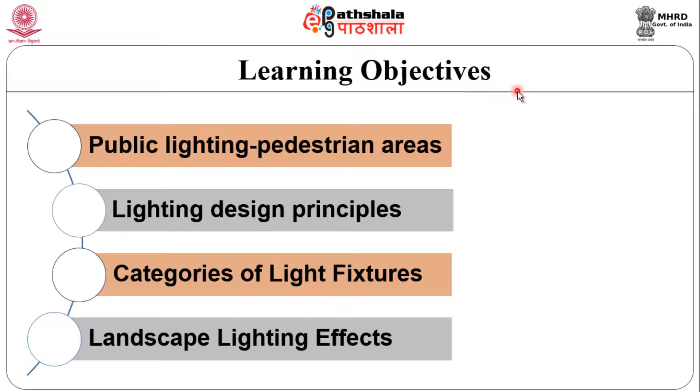Today we will be seeing lighting of public spaces under the subject urban landscape design. The objectives of today's lecture are on public lighting, mainly focusing on pedestrian areas, lighting design principles, categories of light fixtures, and landscape lighting effects.

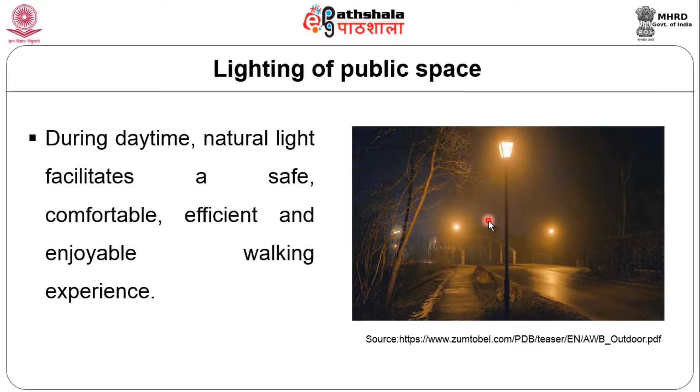Lighting of public space: we know that normally in daytime the natural light facilitates a safe, comfortable, efficient and enjoyable walking experience. The image shown here is a nighttime image. You can visualize how this place would be without artificial lighting - totally dark, a deserted area. But only with the provision of artificial lighting does it become a much better walking space.

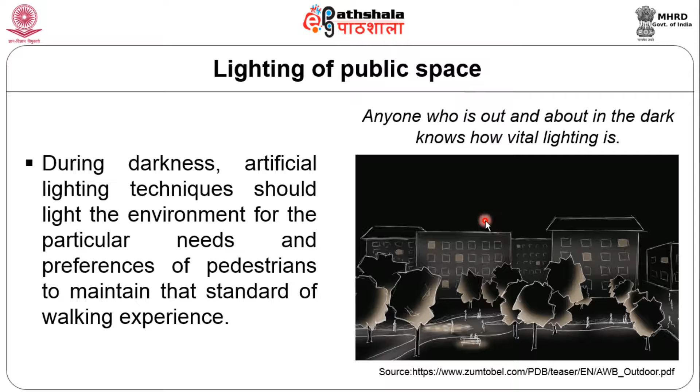So as a saying goes, anyone who is out and about in the dark knows how vital lighting is. During darkness, artificial lighting techniques should light the environment for the particular needs and preferences of pedestrians to maintain that standard of walking experience.

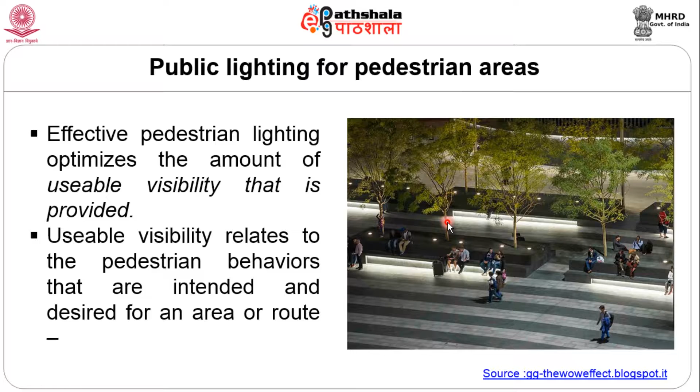Public lighting for pedestrian areas: effective public lighting optimizes the usable lighting that has to be provided. Usable lighting is nothing but the light within the range of the spectrum between ultraviolet rays and infrared rays - that visible light within the color spectrum that is visible to the human eye.

It relates to the pedestrian behavior that is intended and desired for any area or route. So it is the nature of those pedestrian activities and locations that should drive determination of the appropriate size, location and intensity of the lighting.

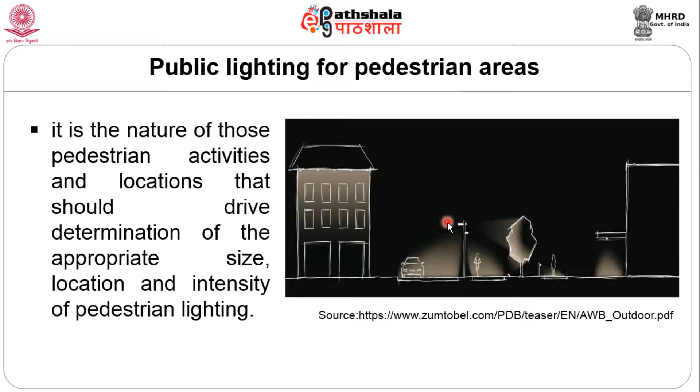So based on the specific area for which lighting has to be put on, you have to decide what kind of lighting system has to be used, what size, where it has to be located, at what distance, and what the distribution of light has to be. This has to be decided for any pedestrian area.

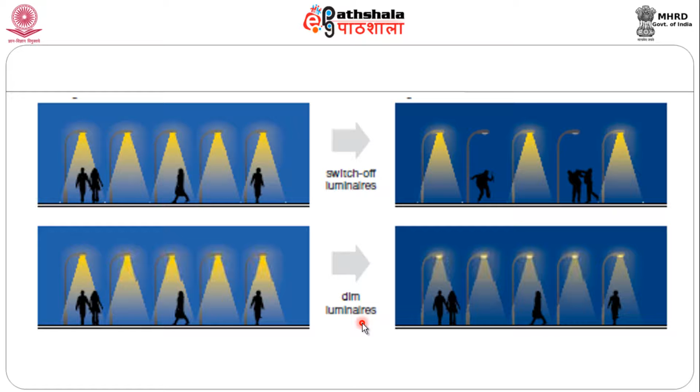Instead you can actually dim the light spots or the luminaires, so that you get a very distributed lighting system all around and avoid lots of vandalism or crime in that area. This way you can also avoid lots of energy losses.

Now we are going to see about pedestrian lighting. Pedestrian lighting is nothing but the lighting kept on open spaces or outdoor areas, where lots of user groups are mainly pedestrians. Lights which illuminate pedestrians or pedestrian facilities are called pedestrian lighting.

There are three types of lighting systems: primary, supplementary, and decorative. Primary takes care of all the lighting put on outdoor areas, mainly for wayfinding and also for safety issues, to lessen hazards. That covers all the primary lighting systems.

Second is supplementary. Supplementary is part of the larger lighting system, useful for highlighting any specific area or task. The third is decorative, which is mainly for aesthetic purposes - suppose we need to highlight a sculpture or a fountain, such decorative lighting is used.

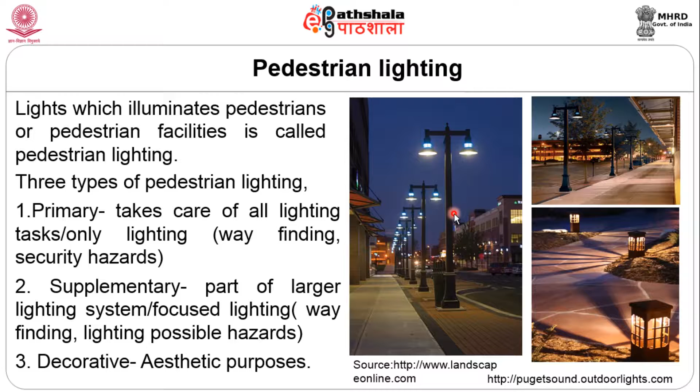Now, public lighting in pedestrian areas. There are three main factors by which public lighting in pedestrian areas can be controlled. The first is the angle, that is the angle between the object and the viewer. Second is the distance between the object and the viewer.

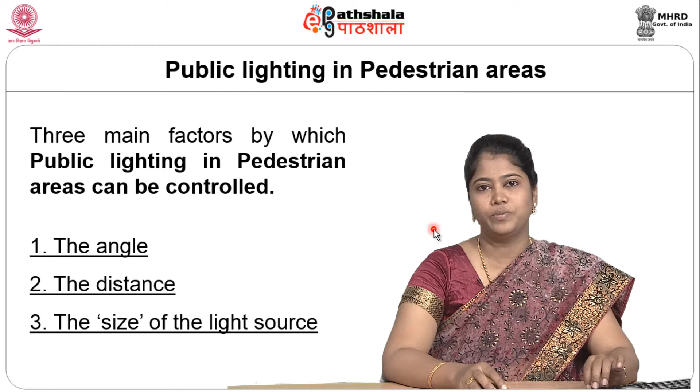Third is the size of the light source - how big the light source or the light fixture has to be. First is the angle between the light source and the viewer.

Lighting is generally off axis. This is normal even in natural light, the sun is not always on top of the head of a user, so it is normally off axis. Similarly, the artificial light that we create need not be on top of the head, meaning it need not be on axis, it is normally off axis.

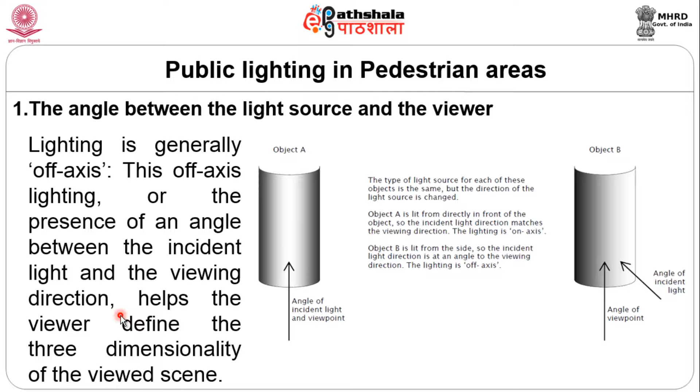This off axis lighting, or the presence of an angle between the incident light and the viewing direction, helps the viewer define the three dimensionality of the viewed scene. That is, when an angle is created between the incident light and the viewer, you see the 3D effect of the object.

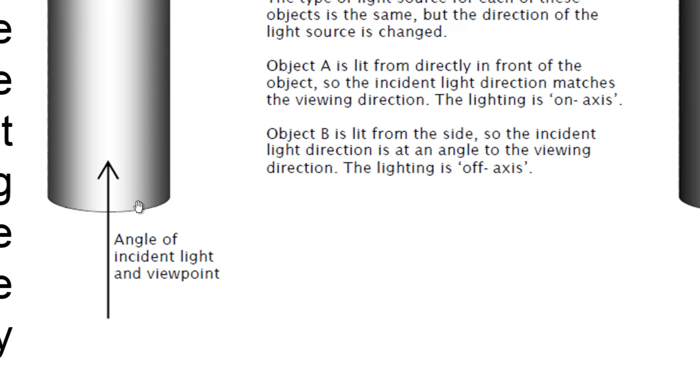For example, in this image you could see the on axis image where the angle of the incident light and the viewpoint is the same. Whereas in this image, it is the same kind of image where the angle of viewpoint is in one direction and the incident light is in another direction, where an angle has been created, then there is a light and a shadow that has been created.

So you see a very well lit object which lets you know about the form and the 3D image or the quality of the object. This is called off axis lighting.

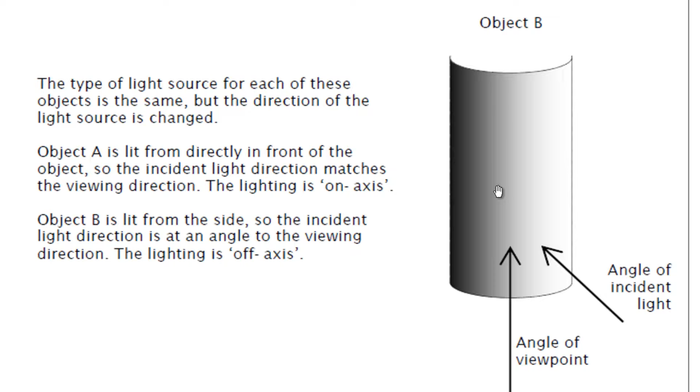The third is the size of the light source, based on how big the light source is. A subject lit by a small light source has a narrow or abrupt transition zone, so the lighting is termed a hard light source.

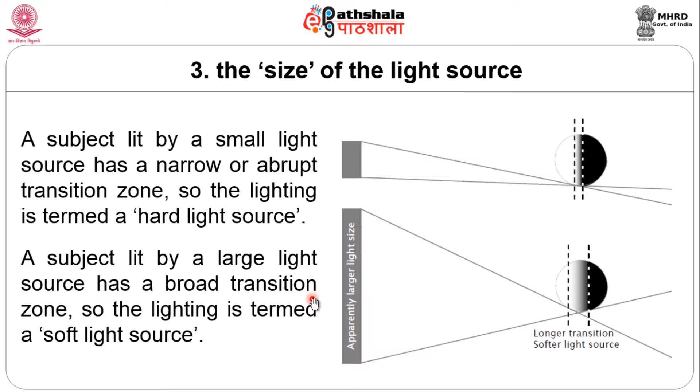The image on top shows a very small light source, where the transition between the lit surface and the shadowed area is very little - this is called a narrow transition zone. Whereas with a larger light source, the transition zone is wider, so it is called a softer light source. A subject lit by a large light source has a broad transition zone, so the lighting is termed a soft light source.

Now we are going to talk about colored lighting. Colored lighting is primarily used in areas where you want to highlight an object, where you want to lit the surface. First under colored lighting is the color appearance.

It refers to the apparent color of the emitted light, the actual color which is evident because of the light source. The color appearance of lighting can be selected to complement the scene being lit to create prestigious and attractive effects. This image shows white light which has been put on the roads, and the effect is so evident that it shows the natural color rendering of the space.

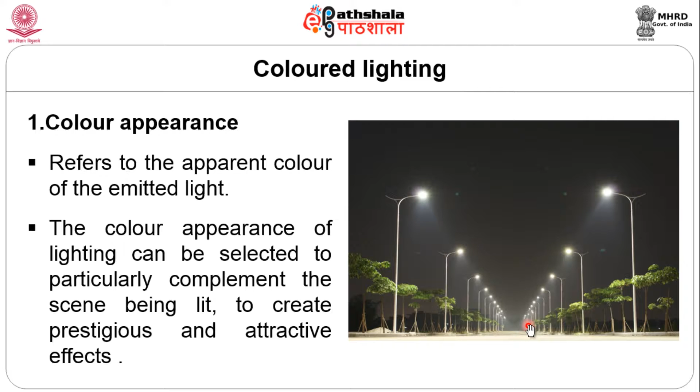The second point under color lighting is color rendering. Based on the quality of light and the color of the light, different effects can be rendered. It refers to the effect that lighting has on the colors of the object it illuminates.

This image is a contrast between the white light source and the colored light source. On the right is the orange light source, like a sodium vapor lamp used on the streets, which gives a very orangish effect on the foliage, the roads, the pavement and the objects placed on that surface. Whereas white light is more of a natural color, similar to a daylight appearance.

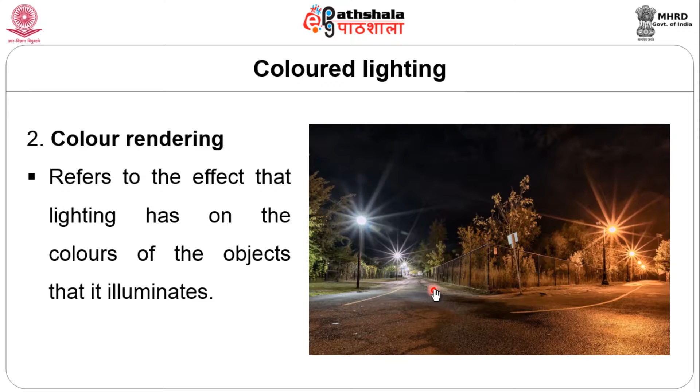The third is the nuisance of light - how we can light the surface, what quality it gives, and what we are supposed to avoid, so that there is no nuisance created because of lighting the surface.

Nuisance of light can be given through misdirection of illumination, creating glare or spill light. Glare is also called nuisance of light because it's light we cannot see in our normal vision. Similarly, spill light is when the target area is supposed to be lit, but we also cover other areas not supposed to be lit. Inappropriate lighting is also called nuisance of light because it's inappropriate in that particular place. Sometimes even over lighting or under lighting can become a nuisance.

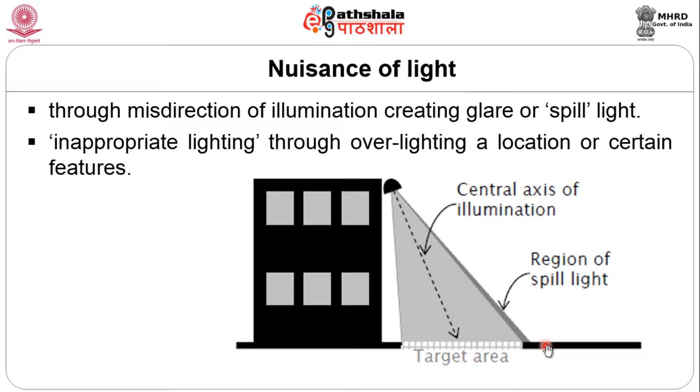This image shows the target area in which the axis is being targeted for lighting. This is the central axis of illumination. The target area is more and there is less spill light, so this is considered normal lighting. Whereas this image shows more spillover light than the target area, so this is called nuisance of light.

Glare occurs when light is seen as too bright, relative to the ambient brightness the viewer has adapted to. For example, when a pedestrian moves rapidly between an area of low luminance and high luminance. We normally see this in underground parking areas, where we step out and tend to get this nuisance of light, glare, because from darker spots when you step into very bright light, you get glare. That is also nuisance of light, so when we design lighting systems we have to take care of that.

Spill light occurs where illumination is provided outside the target area. Illumination can also spill upwards; it need not be on the ground, it can project onwards. Suppose you are illuminating a tree branch, then it's upward lighting. The spill light need not be on the feature, it can be away from the feature, so it will lit the sky. That is called sky glow, which is one of the nuisances of light.

Next are the objectives of outdoor lighting: improving the legibility of critical nodes, landmarks, circulations, and activity zones in the landscape. So wherever people move, gather, or concentrate, and also to differentiate between paths they take. If there is a junction and they want to decide which path to take, lighting at critical nodes helps, and also to highlight landmarks, since landmarks are deciding factors of locations, and mostly circulation points in pathways decide which way pedestrians go. So for all this, lighting is required.

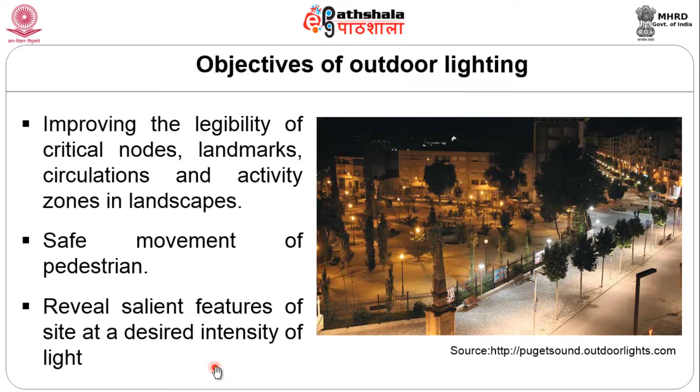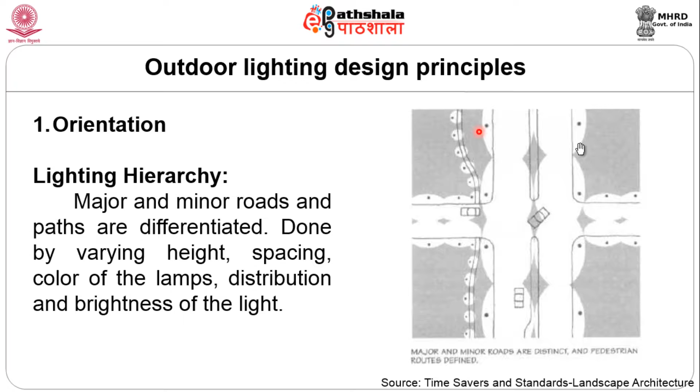Pathways need not be straight, they can be meandering, but based on light positions, distribution, and the interval where placed, patterns are created. This is called lighting hierarchy. The next is clear lighting patterns under orientation. Staggered lighting or staggered layout of roads and pathway lighting tends to obscure rather than reinforce the direction of circulation and location of intersections.

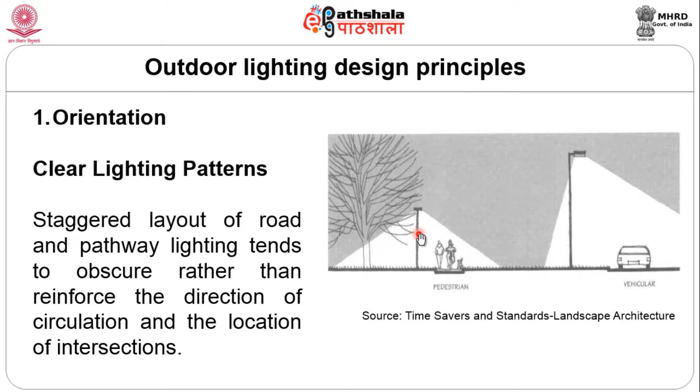The next is intersection articulation, that is how to identify route areas, arrival points, and how to differentiate between the nodal points. First is how to differentiate the decision points, crossings, and arrival points. The presence, shape and nature of lighting will help you determine the intersections.

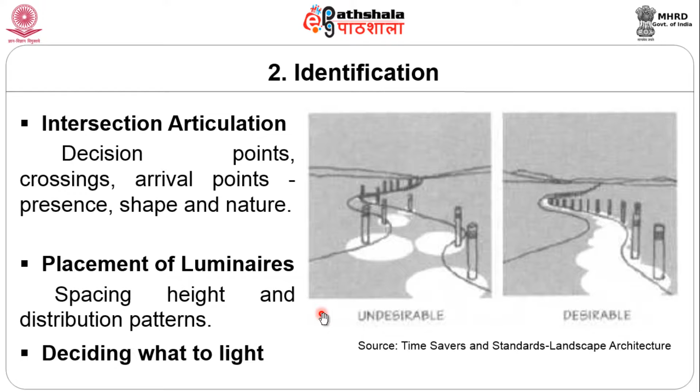That is under the placement of luminaires, based on the spacing, height and distribution pattern of how the lighting system can be kept. The third is deciding what to light. This is much more important because normally we light all areas, which is very undesirable, but we have to specify what area should be lit and which area should not be lit.

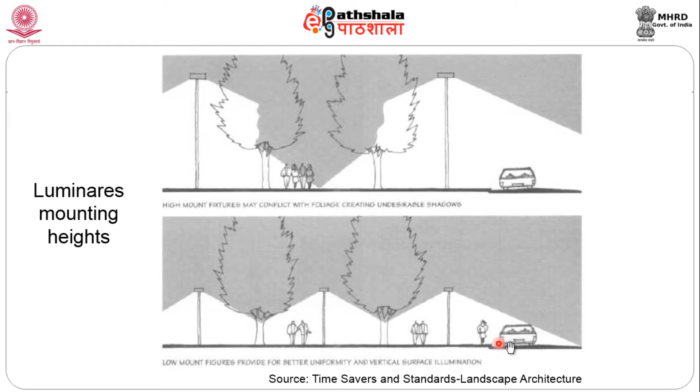So if you start decreasing the mounting heights of the lights, the image at the bottom shows a very desirable lighting system based on mounting heights, so that you get lots of lit surface, and because of the foliage of the trees it is not getting disturbed.

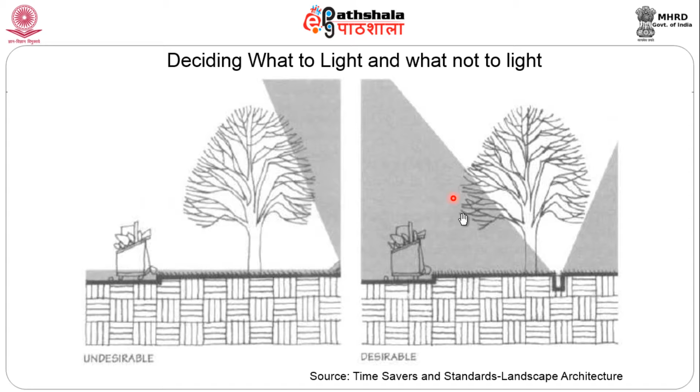There are lots of sunken lighting systems with louvers, so you can highlight only the required feature. It could be a statue, a sculpture, or even a tree that you wanted to highlight, so that you can avoid these undesirable areas. So you have to decide on what to light and what not to light.

The third is safety. Safety is the most important factor to consider in outdoor areas, mostly in pedestrian areas. For safety factors, the first and foremost thing we have to see is glare. If there is lots of glare in the outdoor area, people will get blinded at that particular point, and the safety measure goes off. Glare is nothing but the visual discomfort that we get in any outdoor area.

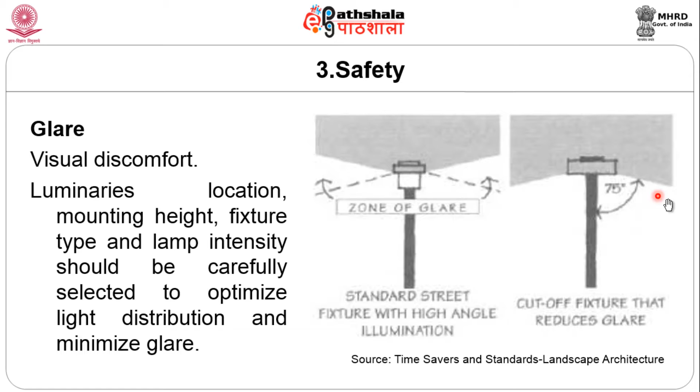The next is underlighting. Even if you have less lighting, which is inappropriate lighting, that is also a safety issue. Less lighting is hazardous to protect pedestrians and public open spaces. So these are certain images of how glare and underlighting can create lots of safety problems.

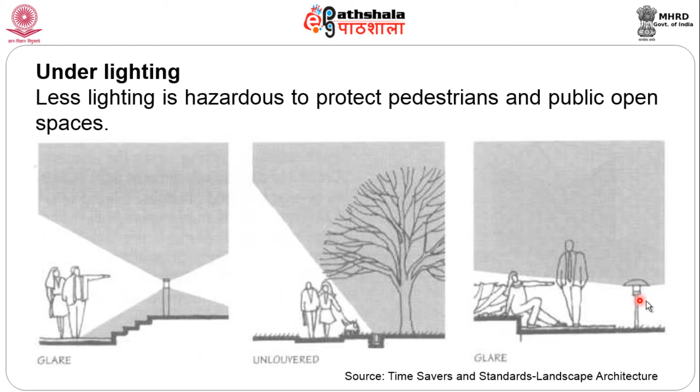The third image is again talking about glare, but here normally light fittings are oriented towards the necessity or need of the people. Suppose if they are walking on the walkways, then such bollard lightings or smaller low level lightings can work. But in case there is a seating provision, or sometimes humans tend to sit wherever there is a possible provision made, then in such cases it is like a glare for them, so that is also to be avoided.

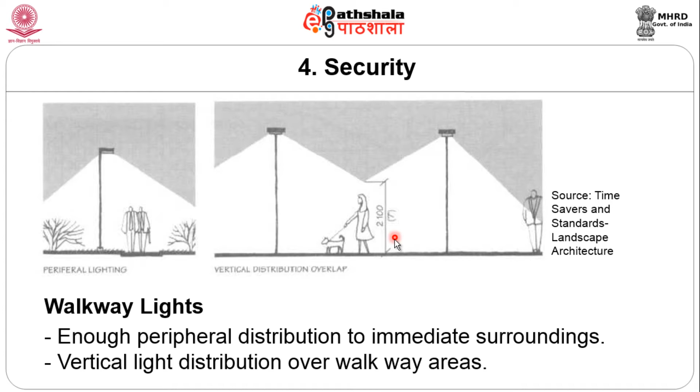The second is vertical distribution over the walkway areas. If there are two lighting poles, the light which overlaps creates a diffused light in the center. This is called vertical light distribution, and this is primarily used in most pedestrian areas, particularly for walkways.

The next is on atmosphere and character - how exactly the atmosphere changes based on the lighting system, and how each space differentiates accordingly. So how does the character of the space change.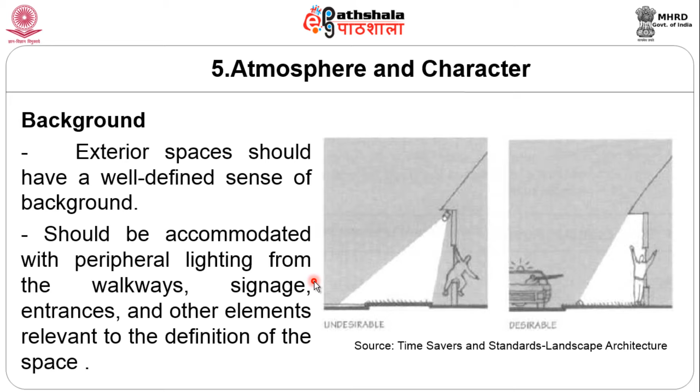So this is considered undesirable lighting, whereas the desirable system is the other way around, so that the pathway is also lit and the background is also lit, or at least a small diffused light can be put on so the background is also known. This should be accommodated with peripheral lighting from the walkways, signage, entrances and other elements relevant to the definition of space, so we know what is happening on the other side of the pathway.

The next is the foreground. Once we know what the background space is, suppose when we are walking in a pathway, what is happening on either sides of the pathway, that is the background. Now, the foreground spaces should utilize local lighting which produces maximum focus, minimum distraction and no glare, because foreground is the actual space that you are walking on. So it should not have glare, so we should know what is happening before us. If there is glare, then a point of blind spot is created.

Next is surveillance, light backgrounds and highlight the entrances. Where you are supposed to light the surface, you should light it properly, and what not to light, you should not light. Next is to avoid vandalism. Of course, proper lighting of foreground and background is required.

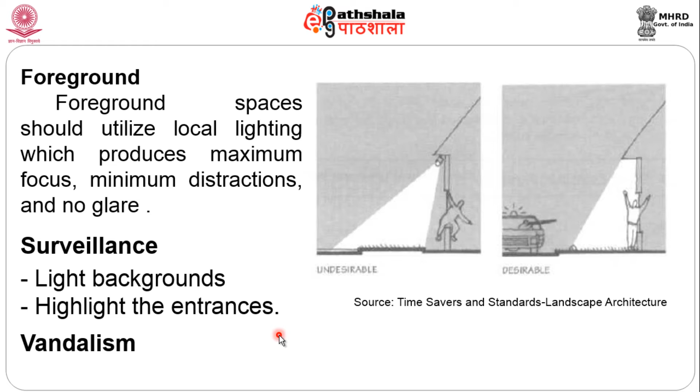Next is on illumination of objects. This has mainly been done to accentuate the shape, that is the form of the object. Suppose if you are lighting the outdoor space, then if you have to highlight say a statue or a sculpture in a park, what kind of lighting system will enable you to accentuate the shape of the structure.

The ability to perceive volumetric form is influenced by the gradient of light and shadow falling on the object. So with the help of the light source only, the object is determined to have its volumetric form. The form is identified only with the light source.

Suppose if it is all around lighting, that is uniform lighting, like the image on the top right, it shows uniform lighting where it has been lit from all sides. It is called a uniformly distributed light source. Then there is not much shadow created, because from everywhere there is lots of light. Then you will not understand what the form or shape of that object is.

But whereas if the light source is only from one point, which is called a single point source, then you create lots of shadows. Again in this area, because of lots of shadows, you will miss upon lots of details, because there is lots of shadowed area and less lit area. So you will miss out lots of details of the object. Even this is also not desirable.

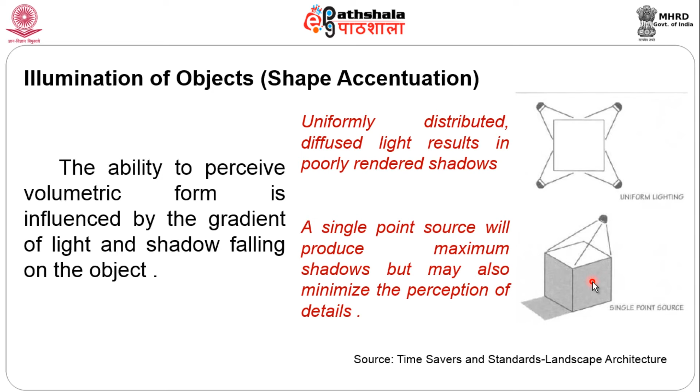So there is a combination of uniform distribution light and one point source light. When there is a combination of such lighting, then you come to know what the form is, the volume of the form, and you also get to know lots of details of the form. So this is considered desirable. One source should accentuate the shape and form by contrasting the surface with sharp shadows, while the other source, the second source, provides fill light for the details. This is called combination lighting.

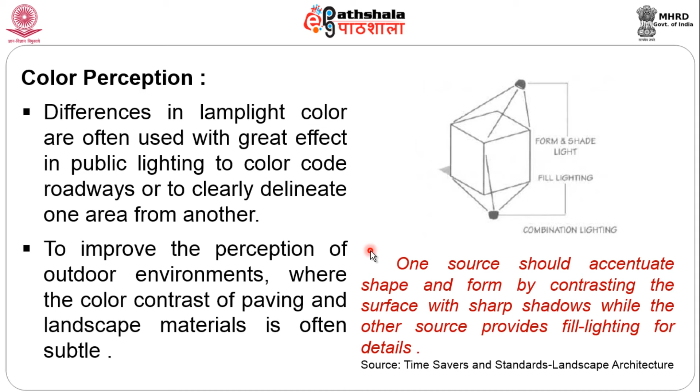The next criteria is on color perception, that is, differences in lamp light color are often used with great effect in public lighting to color code roadways or to clearly delineate one area from the other. To improve the perception of outdoor environment, where the color contrast of paving and landscape material is often subtle. For example, in color codes, as I showed you in a previous image, if you have sodium vapor lamps, then the whole area has more of an orange tint in color, even the foliage of the trees and the objects placed on the street will look more orangish in nature.

But whereas if you use lots of white color, then accordingly the color changes. Suppose if you have to dramatize the space, then you can use lots of color techniques and you can accentuate that space with lots of such colors. That is called color perception.

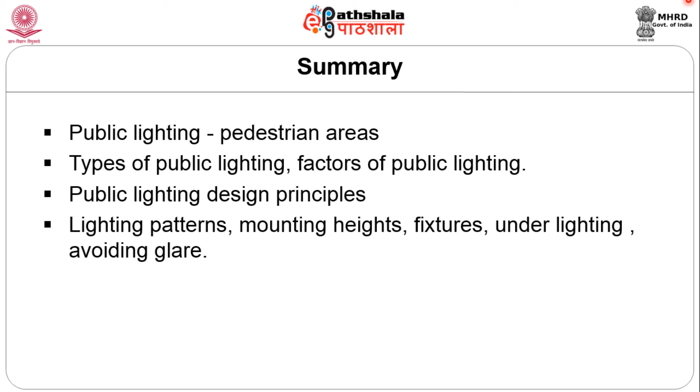So we are going to end this session. We will see the summary of this module. We had seen public lighting primarily for pedestrian areas, what all to light, what not to light, and within this session we also saw the types of public lighting, how the fixtures have to be placed, the factors for public lighting, and the solutions for desirable and undesirable lighting. We also saw the principles for public lighting design, the lighting patterns, mounting heights, fixtures, underlighting, and how to avoid glare. So with this I conclude this session. Thank you.